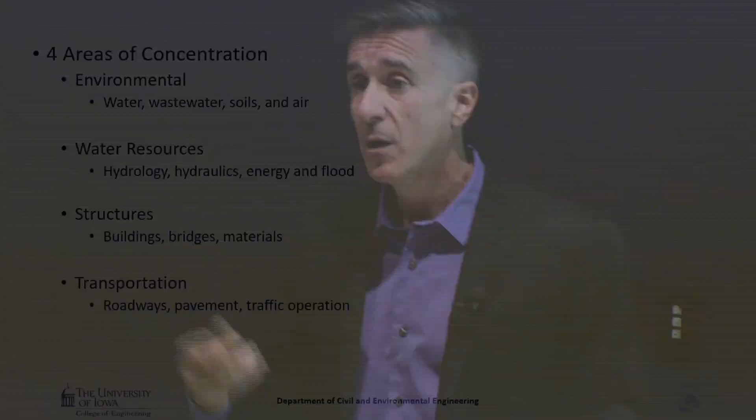So what do we do here? How do we teach this at the University of Iowa? We have four of the disciplines, so four areas of concentration: environmental, water resources, structures, and transportation. And we have 24 faculty members spread across those areas.

Okay, so framing what civil engineers do helps you understand some of the projects our students undertake. Now, as Linda was saying, we've designed our capstone design course as an outreach and engagement process. It's titled Project Design and Management. Most of our seniors just call it senior design. It's open to fourth-year students, who take it in their last semester. So this is really a culmination of all the education they've gotten to this point.

This is where we have to thank Nick and Travis so much, because it's their office that helps solicit projects throughout the state. What we look at is trying to find projects that cover at least two of those four areas, so our students are actually working in what we call an interdisciplinary group within civil engineering.

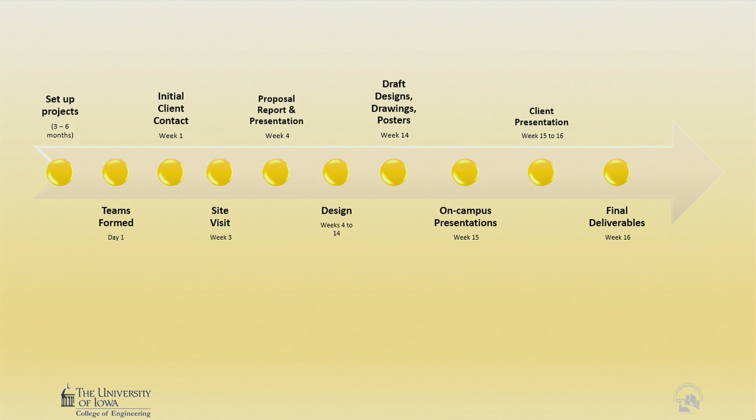So overall, the structure, I'll just quickly talk about the timeline. It starts about 3 to 6 months ahead of time. That's where Travis and Nick and the office start pulling together projects for us. I sit down with them and we go through and evaluate the projects.

On the first day of the semester, the students are assigned teams. One of the interesting things is that the students themselves have to take and pass qualifying exams in those 4 areas. What exams they actually pass helps me assign them into projects. So if this is a water resource project, if they didn't pass the water resource exam, they are not assigned into that type of project.

They also rank their top 3 choices, because prior to the semester starting we provide them with a list of the projects, and they give me their top 3 choices, which also helps us assign them into projects. The third element is the area of concentration - as they go through the 4 years, they choose one of those 4 areas to concentrate in. So with all that input, we assign them projects.

But on the first day, they are handed an RFP - I'll explain what that is on another slide. Within that first week, what they are required to do is reach out and contact that client, and set up an initial visit with the client to sit down, walk through, and get a little more information than what's presented in the RFP.

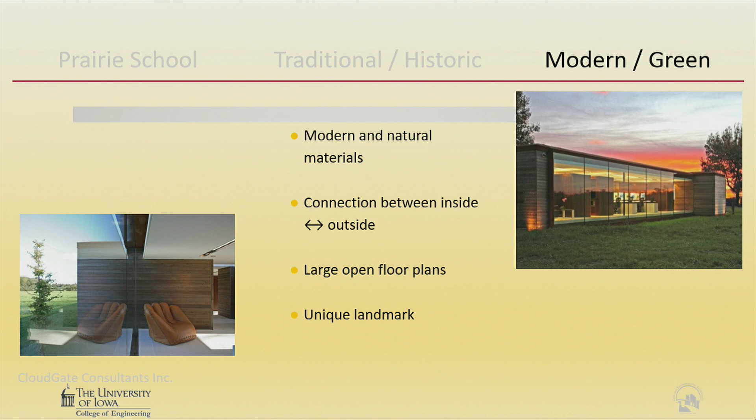So, opportunity for artists to showcase talent outside the studio. Cultural influences can be adjusted to match the style of the Macedonia region. And the last one, modern and green: modern natural materials, connection between the inside and outside. Again, all based off of those initial conversations with the clients.

On the engineering side of things, they did the access roads, with design calculations for everything associated with the roads themselves. Parking lots are one of those things you probably don't think too much about when you park your car, but a lot of engineering goes into that—how you keep and drain the water, how large the parking spots should be, and whether cars can get in and out of those spots with ease.

They also have the actual structural design—this is where our students excel. They took the building's architectural renderings and designed the frame, the structure that actually supports it, designing each one of those columns and beams. They created a 3D model of it and tested it out using structural analysis software.

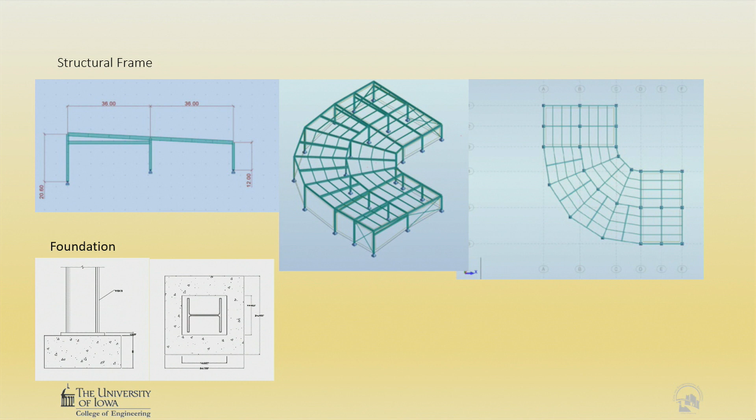So the building is more than a pretty picture. They actually have the structure to support it, as well as the foundation. In this case, I just pulled out a few footings. For non-engineers, you might say, okay, I like the pretty pictures better. But this is really what goes on behind the scenes in most every building that we don't really pay too much attention to. If we look up here, unless you're a structural engineer, you probably wouldn't get excited about whether that's a W flange or an I.

Okay, and then they pull it all together in a 3D model here. Okay, so this is a 3D model.

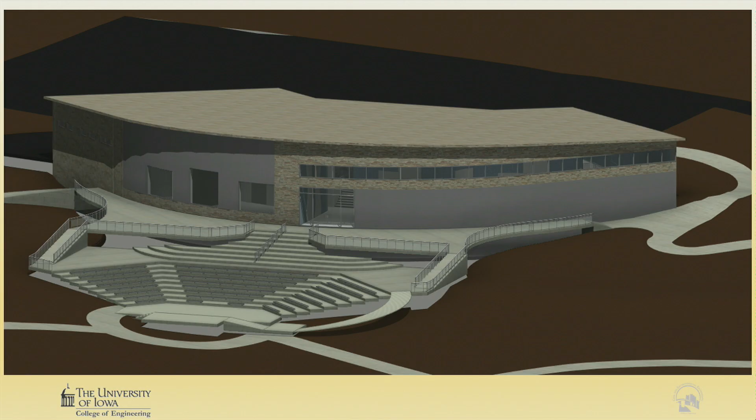It's in software called Revit, and let me see if I can get out of this. Because I want to share with you the fly-through movies.

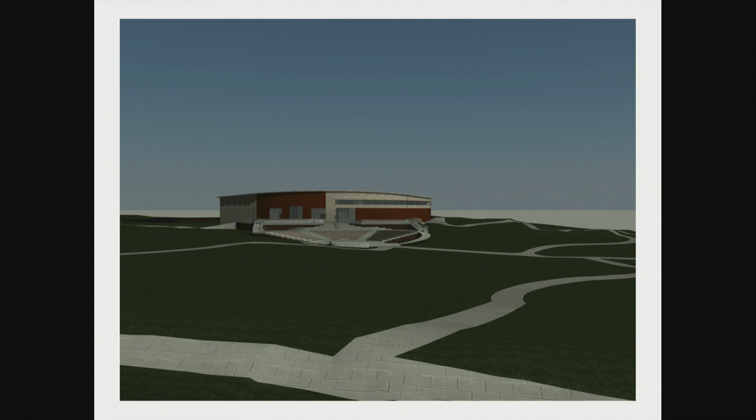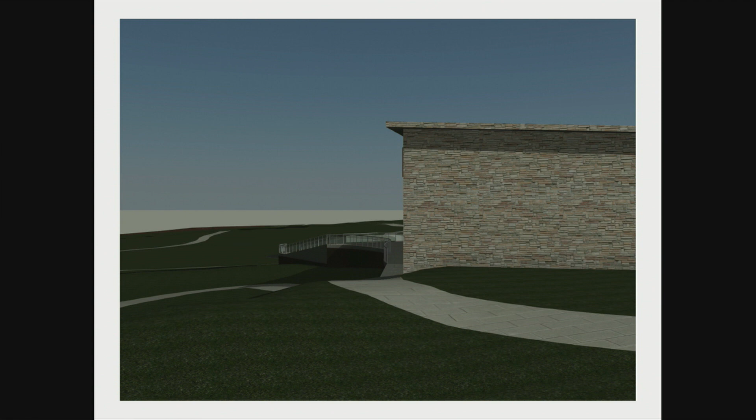So this is the model, the 3D model that they created within their software. You see it's a fly-through around the building, the interconnecting walkways, a view of the amphitheater, again designed, so each one of those elements for the amphitheater, for example, design calculations for the concrete, looking at the exterior of the building. Again, I could ask somebody who's better in architecture, what kind of style is this?

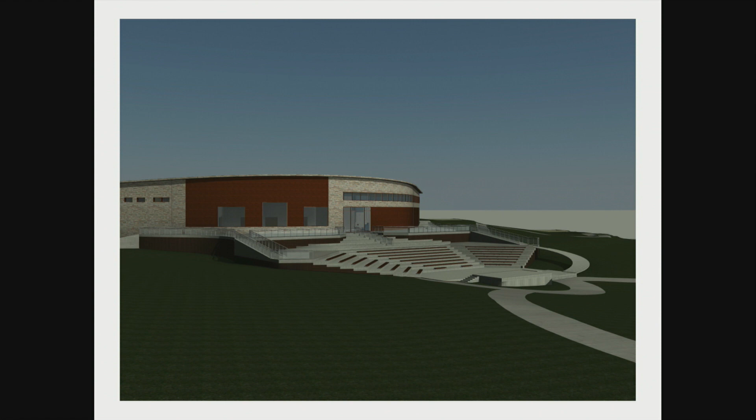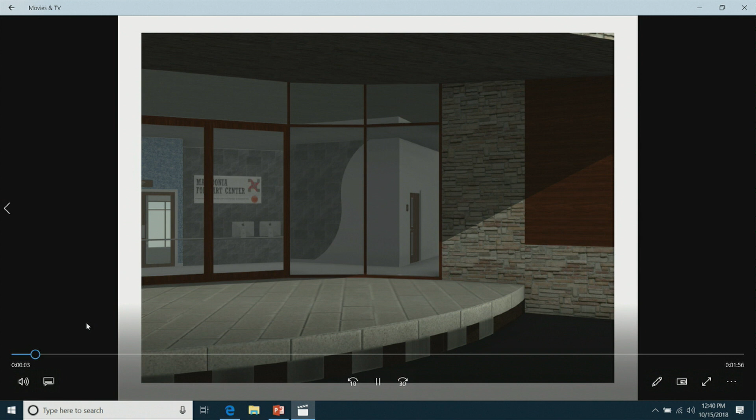And so that's the interior. That's the exterior. And this is their vision of the interior. So again, the layout of the rooms. We definitely don't claim to be interior designers.

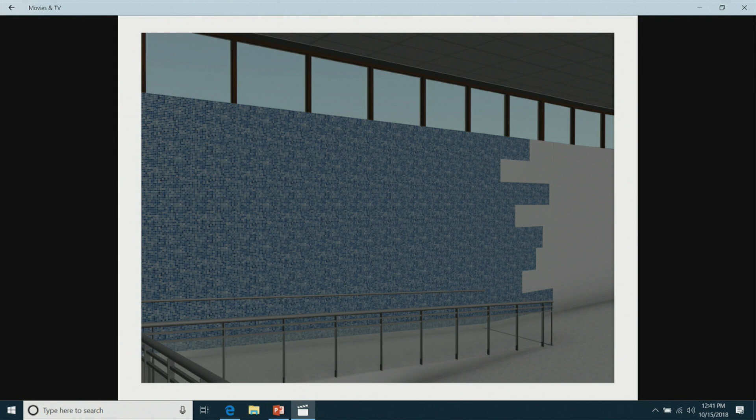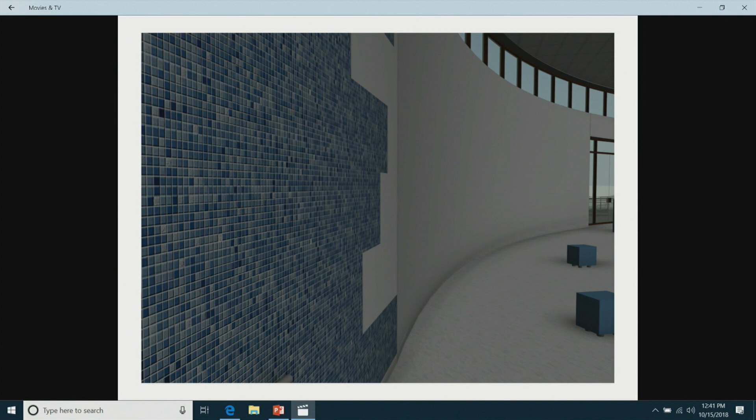That was their big open gallery space. They had a lot of back and forth with the clients about placements of windows, about what would be good or not so good for displaying art.

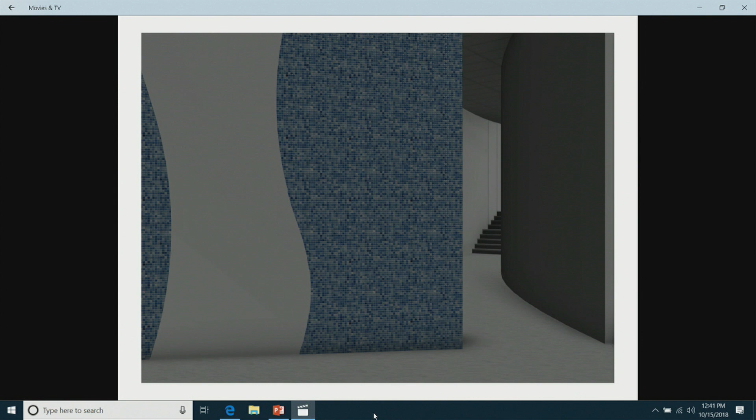So as this is playing, one of the people on the committee was a principal owner of an architectural firm that practices out of Omaha. And the students did a presentation, and they used these fly-throughs. They used a lot of the graphics that I showed you.

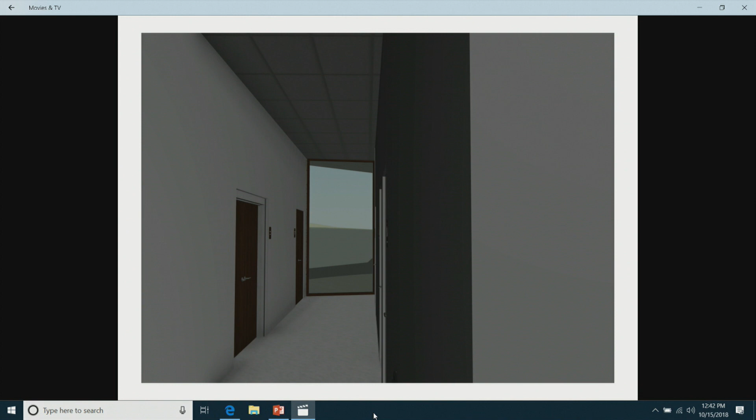And as they were presenting, they finished, and one of the first comments from the principal owner was, 'Remind me, how many people worked on this?' And they're like, you saw their face, they thought they were going to be in trouble. They're like, 4. And he goes, 'And how much time did you have?' 'Oh, like 10 weeks.' And he just stopped and he said, 'I can't get my entire office to do this much work in that amount of time.'

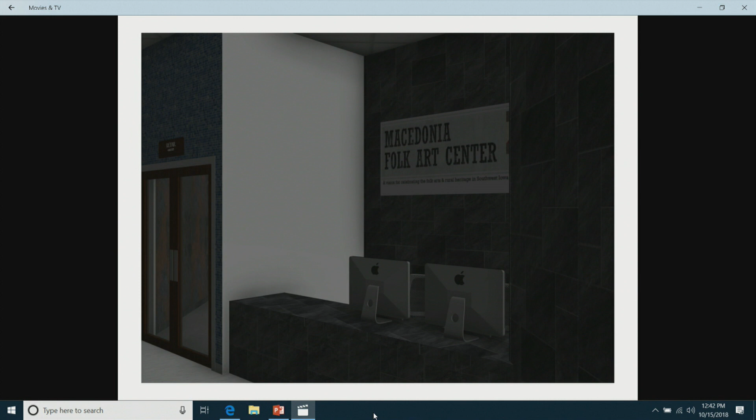And then he's like, 'I'll offer any of you a job right now.' And they all kind of laughed and it's like, 'We like that, but we already are employed.' So fortunately, our students already had jobs at the time.

Okay, so that was the art colony. Again, a couple other examples. We had a condominium development. Now, these examples that I'm picking are very heavy on the structure side, very heavy on the visual side. I was hoping that it would be more interesting for you all.

But the condominium development, this was up in Mason City. It was started with, here's the existing site. It was a private landowner. Her and her husband had been looking to develop this or redevelop this parcel of land for housing. In this case, they weren't quite sure whether it's going to be for seniors or for young professionals. But they wanted to offer dense housing.

Well, anyway, this was a site, and it overlooks the river that runs through Mason City. So what the students were able to do was come back, and after doing that whole thing about the proposals, they came back with engineering designs. So what they put together was a 1, 2, 3, 4, 5-story condo building. Again, what I'm not showing is all the engineering calculations here, but they have the entire structural design for the building laid out.

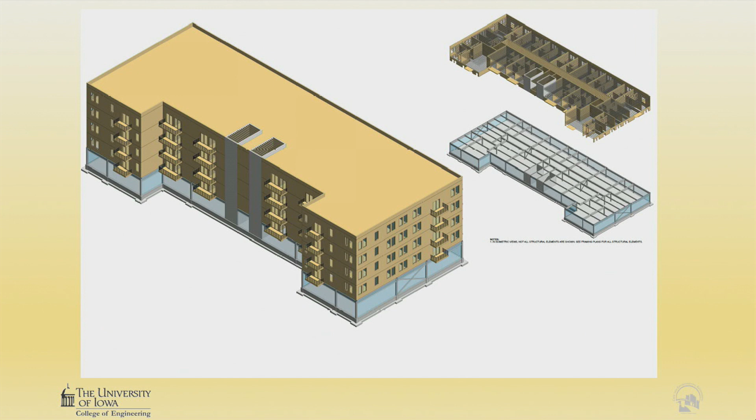They did the 3D model, interior and exterior, again based off of interacting with the client. In this case, it was a private landowner and the planning department within Mason City itself. At the end of the day, they put together some nice renderings.

One of the things we definitely emphasize within our program is to take the engineering information and create something that most people would react to favorably, rather than looking at engineering design plans.

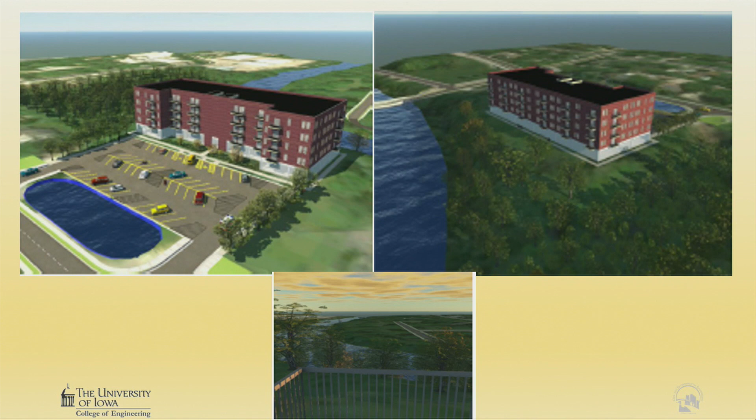So in this case, what you're looking at is the building itself and the site development, where you have parking and, in this case, a detention basin for drainage. They had a difficult time with the sloping of the site itself. Below this is rock, so there wasn't a lot they could do without blasting the rock away.

Just some illustrations of how our students are, I like to say, the engineer and more.

In the paper where students did their background research, it was a big deal when they had the first motorized fire truck to use the building. That was in use until the 1970s, when they decommissioned it as a firehouse. Public Works took it over and used it for the sign shop, where they made the traffic signs, and that lasted a decade or so. In the 1980s, they abandoned it, and it was no longer used.

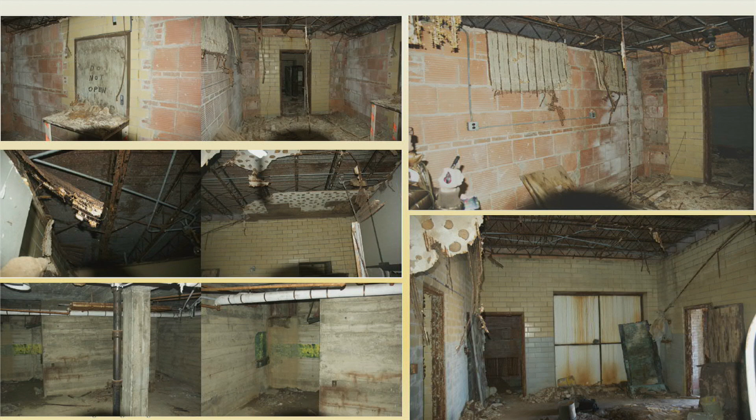The interior wasn't so good. Notice the ceilings caved in, pretty much the roof in most sections really just rusted out. It was in general bad shape, except for the foundation.

This is the basement. The foundation was almost pristine, partly because when they poured this back in the day, they just poured like a 24-inch wide concrete wall. Nothing's going to be moving that, right? And there was very little water coming in.

So the students were tasked with: can you restore this? Can you take everything that's wrong with it and come back, for example redo the roof? The students came in and did the structural analysis and structural design of the roof. There were a couple of walls they had to analyze for replacing—it was masonry block. Here are some of the engineering drawings, the roof plan with the web girders.

Also part of this was they needed to locate parking, because one of the things the city was looking for was whether they could restore the building and then sell it to a private entity, maybe like a doctor's office or some other type of retail. But one of the challenging things was how do you get some parking in here.

So our students had to try to design some parking on that little lot and not encroach into McDonald's parking either. With that, they created their design, and with some of their 3D rendering capabilities, they went from before to after, and before to after again.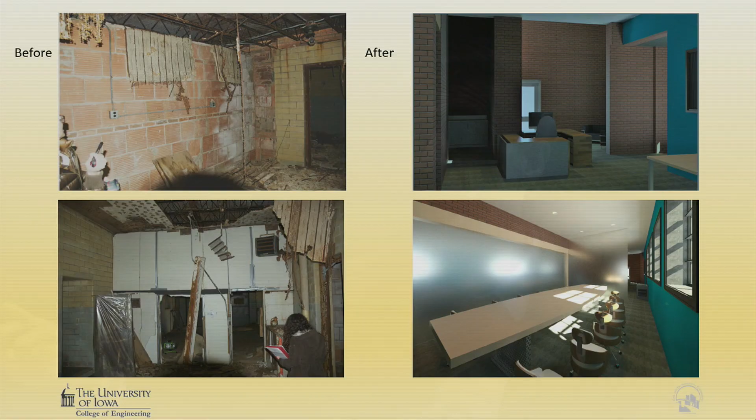More 3D models. What I would also emphasize is that when we ask them to do those 3D models, it's not just for the pictures—they actually do some of the analysis with that. So those are three of the 77 projects that we've created.